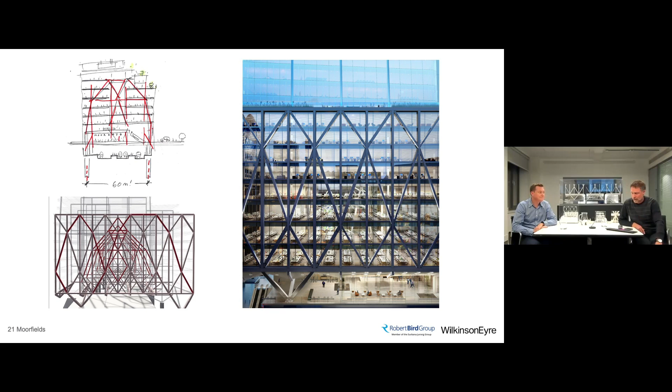The first thing I'd say is, well, WilkinsonEyre's reputation is we don't get asked to design very many office buildings, and 21 Moorfields is really a bridge over a station, and our expertise over the last 25 years has really been bridges and stations. Dave and I were just talking about this earlier, and 8.5 years ago, Landsec brought them on. I didn't really know who they were, but their reputation was in construction and piling, and 21 Moorfields, if anything, is a piece of construction over a piece of piling. So in a way, we're both playing to our strengths and learning a lot along the way.

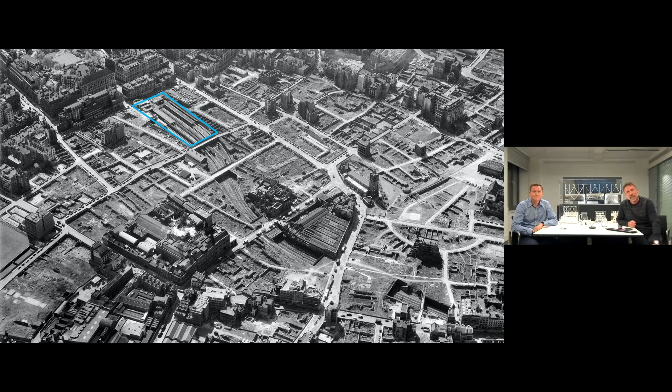So here's a picture of the site just after the war, well, 10 years after the war, actually. It's boxed in blue there. Moorgate Station was a cut and cover station with canopies along open platforms, and you can see what a landscape it was then subsequently developed into. As the Barbican got built, the London Wall development got built, and that whole piece of London became a rather 1960s, probably a lot of it not very characterful, but certainly something that you'll all know.

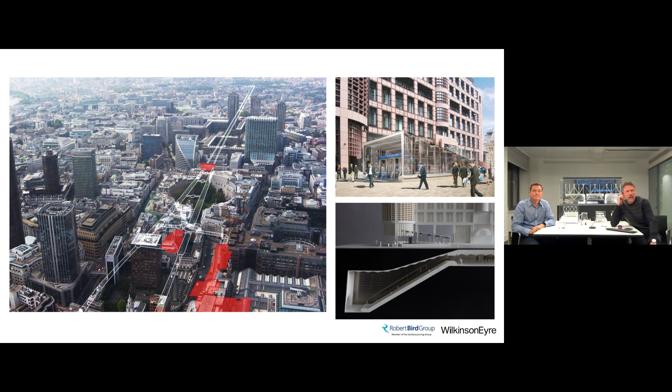WilkinsonEyre have actually been working on the site for 25 years, ironically, as after doing the Jubilee Line extension, we got involved in Crossrail. And Crossrail trains are so long that the station is actually Liverpool Street and Moorgate, with the trains end to end and a canopy entrance at both ends, so one at Moorgate and one at Liverpool Street.

This slide shows the Liverpool Street canopy, which is now built. It's got a hoarding around it, waiting for the train lines to catch up. I don't know if Michael's going to tell us more about that.

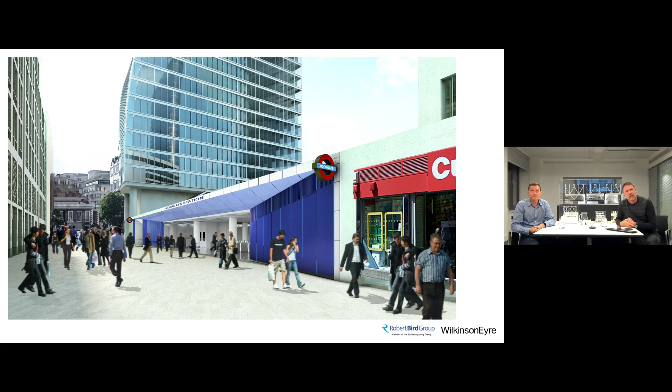At the other end, it very nearly happened that we proposed this ticket hall, and it completely goes over Moorgate, the six lines plus the new two Moorgate Crossrail lines. And it very nearly was just a one-story building in the city.

Michael reminded me when I came to present it through the planning process that actually through the Crossrail development, he argued strongly that Crossrail should invest in putting in a pile right through the middle of the Crossrail station, so that the building could then carry a development over the top. And WilkinsonEyre did a study to work out how this pile could be threaded down through the Crossrail tracks.

Ironically, we didn't know we'd be back eight years later trying to build a building over the top of the station. In fact, Land Securities, when they appointed us to look at the station, to look at the oversite development, didn't know that we were the architects on the station. There was nearly an embarrassing conversation where they said, 'Oh, are you conflicted? We can easily find another architect if you don't want to do it.' But luckily, we convinced them that we were the right people for the job.

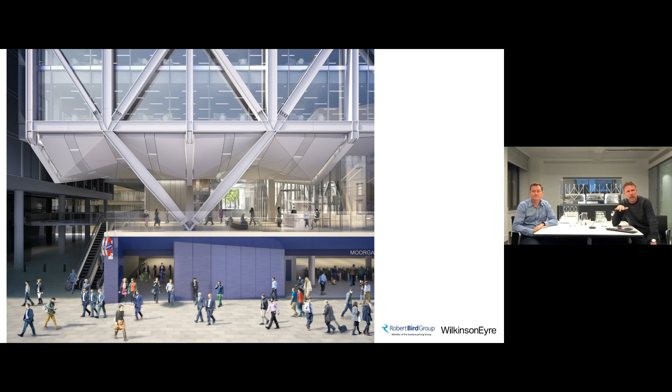And luckily, too, we looked at it not just as a station in the ground floor of a building, but we thought actually you could lift the building above the station and let people flow underneath it. If you think of how this part of London works, A, it's very dense, there's lots of people spilling out of Crossrail, but B, the Barbican is just behind, so creating a new level that people could use as a new bit of city with places to sit and places that trees are planted.

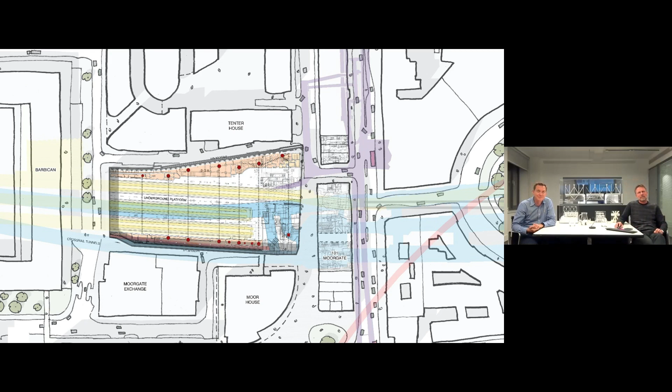Some of the spaces were mess rooms or changing rooms, locker rooms, and could very much be relocated, but other zones were switch rooms or transformer rooms, cables powering the operation of Moorgate Station. So it's a good picture of how heavily constrained the problem was underground, and Giles will later talk about above ground.

So the first big challenge from an engineering point of view is how do you create foundations within an operating station? It's important that the agreement between our client Landsec and London Underground was that Moorgate Station would keep running with no interruption through the entire construction process.

Where some other oversite developments have had the benefit of phased or periodic closures of stations, we had to work out a method to do this while maintaining the full operation of the station throughout. On the screen here I've taken a couple of approaches, relatively unconventional, but that have been done before.

In the middle there's an image I've credited to Arup on their Claridge's project, using a method of hand-dug caissons. That's the same method used for Exchange House at Broadgate by Skidmore, Owings and Merrill. An alternative, used with Foggo Associates at Cannon Place on the right-hand side, was to create groups of mini piles.

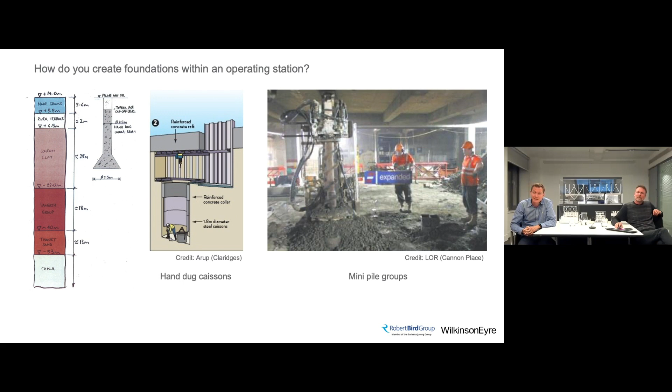Now both these approaches are technically feasible, but both create a lot of muck and disturbance in the station environment. Actually, one of the biggest constraints with the brief we were working to with Land Securities was that both these methods would only give us about half the capacity we needed at each of the support positions.

So Giles, if you'd move over. Yeah, there was this light bulb moment really early on, a very exciting idea, a different way to look at how to create foundations in the station environment. It was to say, essentially, can we treat the deck and the roof over the station as our construction site and try not to be in the station environment at all?

It needed us to create a full temporary steel deck over the top of the station. But what it opened up was the possibility for really large diameter piles to be used, a very large piling rig, like you would essentially on a brownfield site.

It also meant, if we thought about how we designed the piles and the pile casing - you can see the pink in the section sketch there - that pink indicates a steel casing coming right through the station environment, up above onto the roof.

So we could use the piling rig, and all the spoil arising out of the drilling operation would actually arrive up above the station and not cause any disturbance. I love this drawing because the piling driver is driving around on the roof of the station, and there are all these commuters waiting to get on their train down below.

And it really was built like that - it ran 24 hours, so it was all through rush hour. Apparently if you break the Circle line it costs £900,000 an hour, so we were very careful not to.

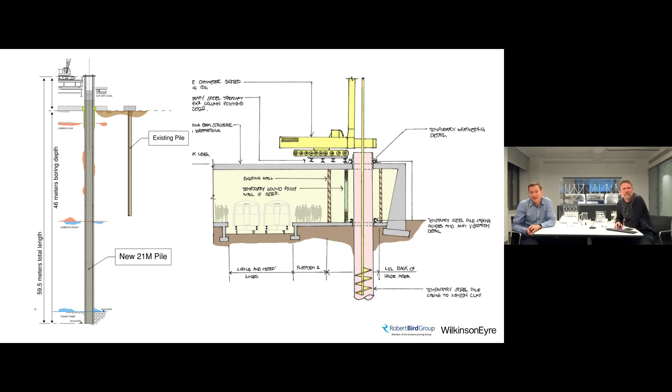Just one last thing on the previous slide, Giles, if you can - on the left, that's a section of one of these piles to scale. It shows it goes right through the London clay, through the Lambeth group, and toes into the Thanet sand. That was really important to get the capacity we needed, and I'll touch on that a bit more.

So we knew we could only build in those two strips of land, north and south of the station, and we thought, well, that can't be that hard. But when we got inside, everyone had an opinion about where you could and couldn't build the piles. It's actually public-owned land, so we had to get mayoral approval.

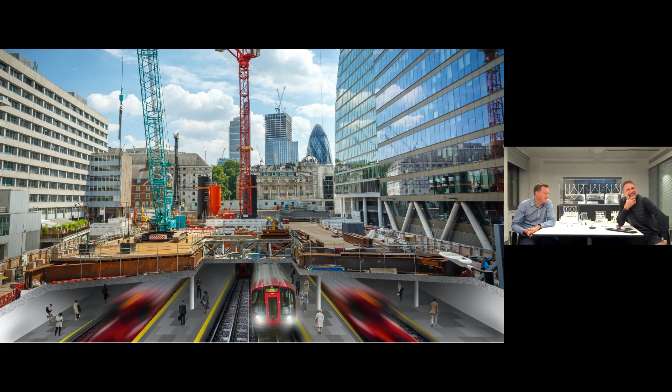And of course, this pile is like this massive big drill coming right through the ground. That room was toast afterward, nothing left, but we certainly managed to get away. I think those images show pretty much the content of the first hour to hour and a half of our design team meetings through 2014 to 2017.

And Giles, you loved every moment of those piling meetings, didn't you? Yeah, he would sometimes throw his toys a little bit and say, I'll come back when we're going to talk about the facade, it's a bit more interesting.

You're not wrong. Obviously this is an edited picture, it's just trying to show and give some understanding of what was above the station and what was below the station at the same time.

So you can see all of the rusty steel there is the temporary steel grillage that we erected. The light blue crane is a slave crane, it weighs about 200 tonnes. Behind it there's a black mast from the piling rig itself, again another 200 tonnes. You can see that temporary steel grillage spanning to the station columns, meaning the station roof takes no loading, but we are temporarily supporting the weight of that piling operation on the station columns.

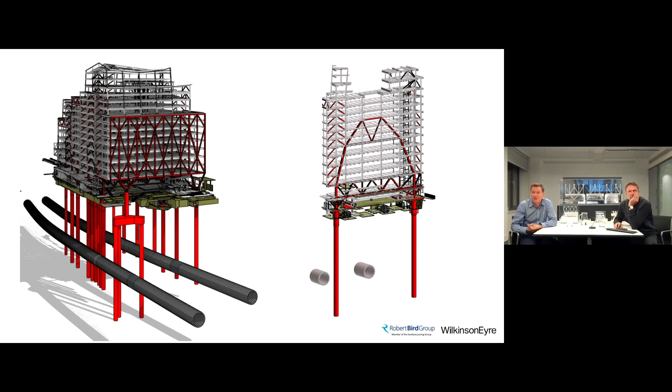So eventually we had a really big challenge. In order for the building to be viable and meet the brief of our tenant, we really had to push the envelope with piling technology and design these piles for a load that hadn't been done before, about 65 meganewtons.

In order to do that, we had a good theoretical basis for justifying that capacity, but we had to prove it. This table and image show the bespoke test pile rig we put together to do that test. There are 4 piles used as anchor piles, as tension piles, to generate a static compression force of 50 meganewtons. So we loaded this test pile to 5,000 tons, much higher than what had been done before on the other projects referenced there.

Interestingly, the test pile performed much better than we thought. It was meant to fail at that level, at 50 meganewtons. We extrapolated that it probably could have continued to carry load to somewhere between 60 to 70 meganewtons, much higher than expected. It opens up the thought that there's more capacity to be explored in the Lambeth Group and the Thanet Sand, which maybe enables more efficient development or taller buildings.

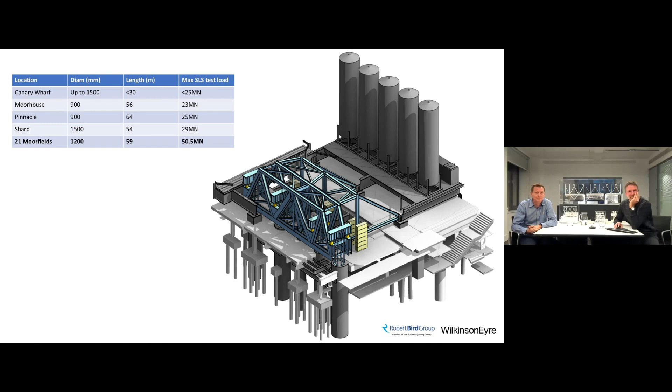Here's an image of the actual test pile structure that we created. I'm not going to move off this section without saying these are the highest capacity piles ever built in London.

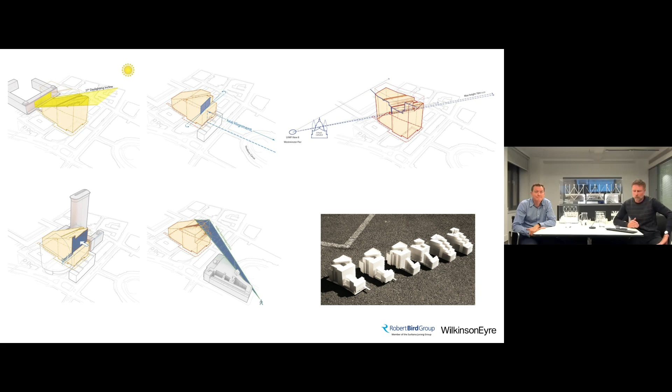While that was going on below ground, we were struggling to find a form above ground. A building like this, with such an extraordinary challenge and cost of building underground, isn't going to get away unless you can absolutely maximize what's possible above ground. We did that by creating a solid block and then cutting away constraints, such as the rights to light to the Barbican, a setback on the upper floors that the city wanted to see from Moorfields, and keeping out of specific sight lines of Finsbury Circus and St Paul's Cathedral from Westminster.

It's worth looking at that view. If you ever go and stand in it, I thought it was a bit of a fuss over nothing until I went down and stood there. It's a really impressive view because you're seeing St Paul's Cathedral set in blue sky, with sky either side of it, behind the Royal Festival Hall. You're looking east and you can see the cathedral. So we would have been in the backdrop of this, and we were forced not to be.

This created a crease across the roof of our building. If you can see St Paul's at the top there, the crease behind what we call the crown of our building is created just by staying out of the view between the two church towers as you're looking from Westminster. Then this rotated upper floor facing towards Finsbury Circus is again an architectural response to a local setting.

It's interesting to see that if you look back at buildings tried for this site - two by Foster, one from the mid-90s and one from the mid-noughties - they both effectively tried to keep out of this view from Finsbury Circus by stepping down towards Moorfields, similar to how we stepped down towards the Barbican to the north. To the east, we said, well, no, we're going to rotate our facade and look straight down the avenue, centring ourselves on the avenue of the circus. The city, Peter Rees at the time, found this a very attractive urban move and was very supportive of having a bigger building to the south.

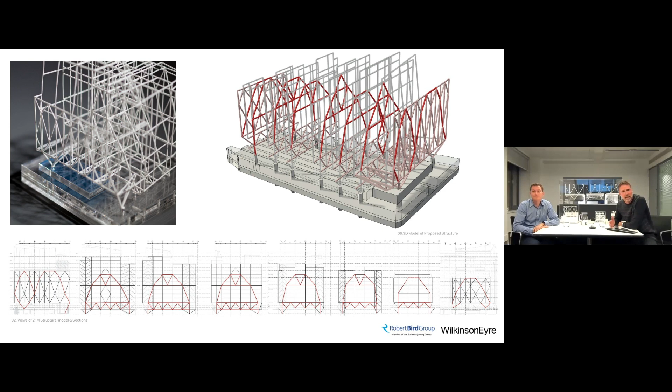The challenge for us, though, was that the chaos of the placing of the piles and the randomness of the different section of each truss across the length of the site made it very difficult to create anything approaching an architecturally expressive form. That for us has been the real challenge of making this into a piece of architecture. I think the answer really came from getting into the structure, really understanding it, and making it do the talking. And over to you, Dave.

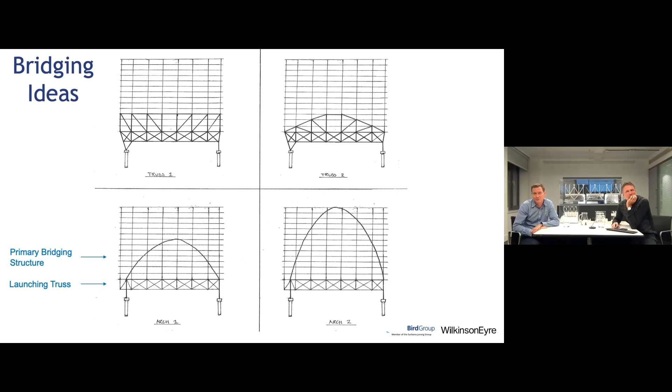One unique thing about our thinking on this project was when using something like an arch as deep as that over, say, 10 stories, the structure doesn't really do the job of bridging until that 10th story is in and the full bridging structure is available.

So it can create a condition where a lot of temporary works is needed to support the structure until that element's in. We tried to think differently about the incremental creation of a bridging structure: firstly, using a compact trussed form at the bottom to give us capacity to build the frame above. As we build the frame, we create the primary bridging structure, minimizing temporary works and making the build very simple. We established this launching truss at the bottom, and then build relatively conventionally from there.

Even the launching truss, we evolved our thinking quite a lot with Giles and his team. Initially, we thought a heavy truss structure, we want to hide that, or integrate it with the plant space and loading bay so it's not seen in the spaces. That was quite compact, not very efficient, and made it quite difficult to work around. Giles and his team were really open-minded about how do we actually embrace this and make it part of the architecture.

So it was much more efficient to move toward, and we eventually delivered, this design where the launching truss has moved up into level 1. Originally, where it was in the plant zone, you had to drive all the trucks in, and the loading dock, water tank, oil store, and all these things had to sit alongside these massive big trusses across the space.

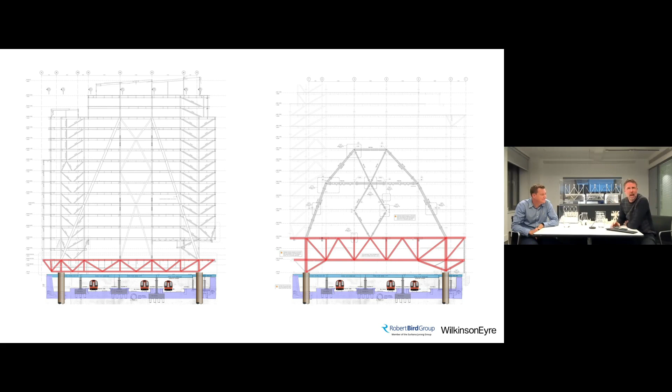We had this emergency meeting saying we just can't fit these things in, and Robert Bird suggested we move this up to the upper level. Could we live with that? We thought, well, actually, suddenly it's a great thing. Everyone walks through it every day, and you're aware once you're in the building that you're in this massive big truss, or series of trusses, and the main street of the building goes down through the arch one after another.

So with this concept to launch the frame on a launching truss, shown in red, we then started to think with Giles, Land Securities, and the letting agents about how do we form the primary bridging structure. The thought initially was this Queen Post truss concept, where essentially we've got two raking sections, close to vertical, as close to vertical as we can make them, so they don't intrude into the space so much. Well, that was the view at the time.

But what we found as we analysed this is you can imagine the loading on the floors in the middle of this system, where the vertical bracing is shown. That floor loading is having to hang up to the node of the Queen Post truss at the top of the frame, and then strutting compression back down. It's a really long load path and not a particularly efficient one.

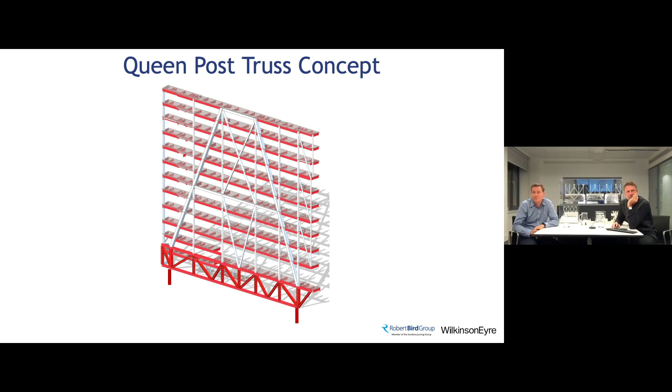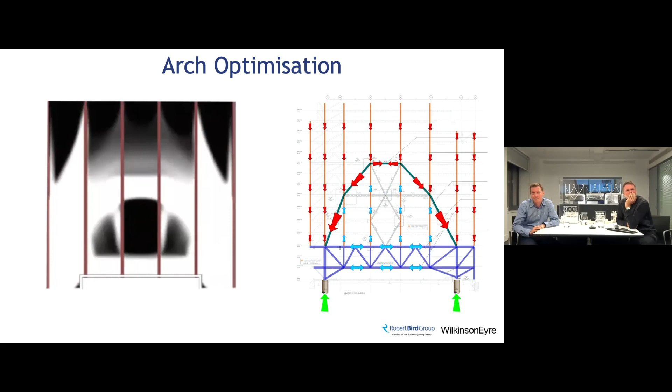So we started to think more about how to bring more efficiency to this form. Some topology optimization, form-finding analysis on the left-hand side, giving the computer a bit of freedom - we set the constraints of where the vertical column grids were, but gave the computer freedom about the geometry of a bridging structure. It's returning something quite intuitive, that an arch is the more efficient form. But interestingly, it's also returning that the height of the arch is more efficient around about this level - I'll come on to that on the next slide.

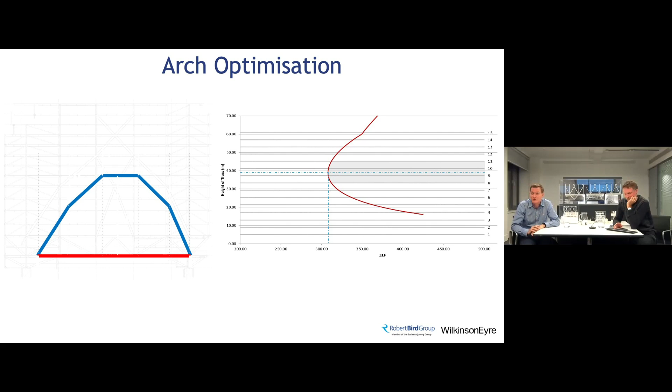The graph on the right-hand side shows, on the bottom axis, material usage - increasing material to the right, less material to the left. On the vertical axis, we're showing the crown piece of the arch, how high the arch is. Interestingly, you can see there's a sweet spot, and we might have expected it to be more specific, maybe at one level, but there's actually a zone that is a sweet spot - around about 8 to 10 levels was the optimal height for the arch structure.

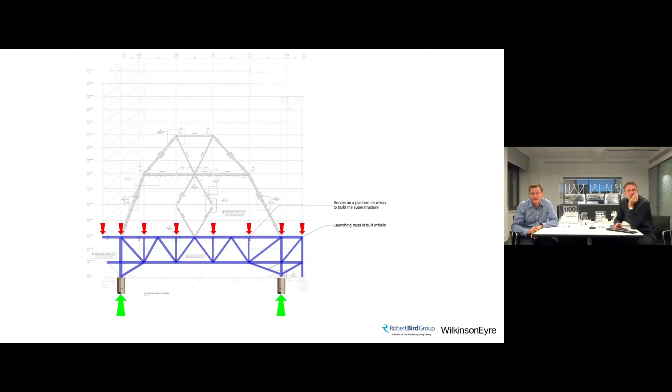And here also, these next three images indicate how the frame actually becomes erected and built off this launching truss, and show some of the force paths. That's just showing the assembly of the launching truss initially. Jump to the next one.

As we build the frame up, you can see vertical loads coming onto the launching truss here, but we don't have the arch assembled yet, so the arch is not contributing to spanning across the station at this point. You can see in the launching truss, the red arrows are compression, blue arrows are tension, just conventional bending action in that launching truss section.

Then once we form the arch, it starts to contribute as a primary bridging element, carrying compression thrusts indicated by those red arrows. As they land at the base nodes, they start to induce tension into the launching truss. It actually reverses the compression that was in the top chord of the launching truss and puts that chord back into tension, so we're getting a full load reversal in that element. It means we're using it really efficiently in the temporary case to help us build this, and then reversing its load in the permanent case—getting two birds with one stone, you could say.

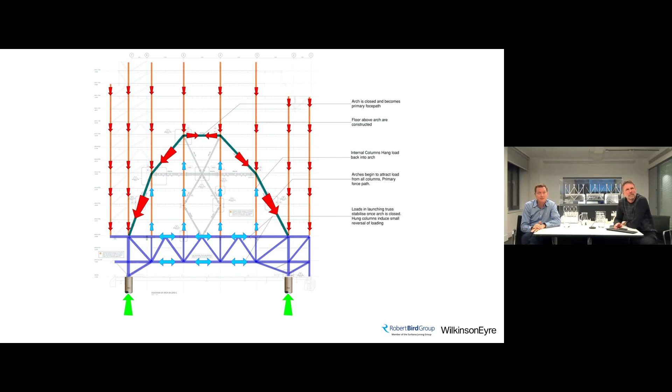We're right at the cusp of joining this building up, and meanwhile the Circle Line is thundering through every day. So the final bit of the story we wanted to tell is to do with the east face truss.

Which is probably the most special bit, because it's maybe not the most difficult, but it's the bit that everyone will see every day as they walk to work and pass the building. It's a real look-no-hands moment of floating over the public space and the station below.

We'd been solving this problem ever since we started on the project, and we knew it was going to cantilever 11 to 12 meters in one direction and span 48 in the other. It tessellated into a grid of 11 bays across and 7 stories high.

And as these are both prime numbers, it gave us a bit of a problem to find a pattern that was easy to recognize and felt like the front of the building. It's worth saying that 11 bays is 12 columns, which is quite a special number—the only other buildings I know of in the city with 12 columns on the front are St Paul's Cathedral and the Bank of England. But enough about that.

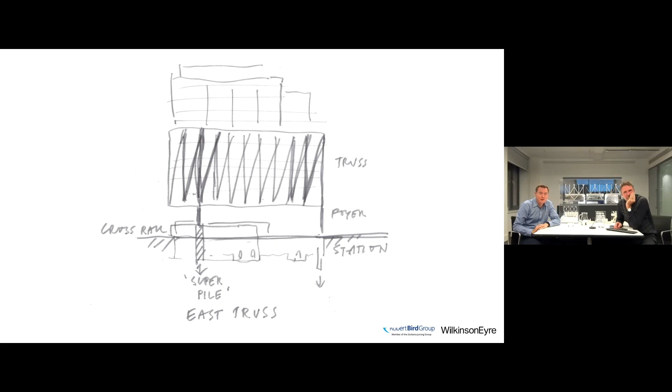We were very excited by that notion and the challenge, but also looking at the initial sketch, the feedback from the engineer, Giles, was: from my point of view, it's such a long load path to have diagonals that hang that way over the full height of the structure—that type of form is not the way it wants to carry the forces.

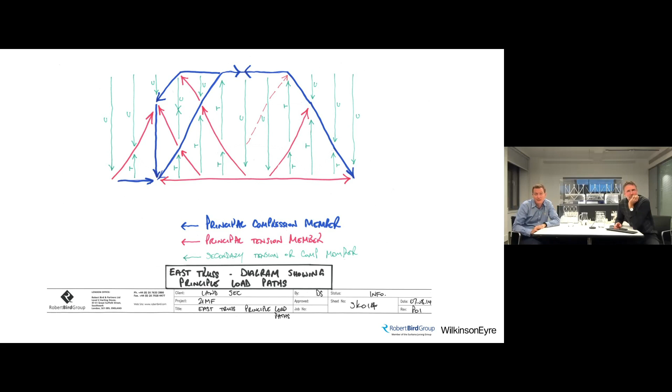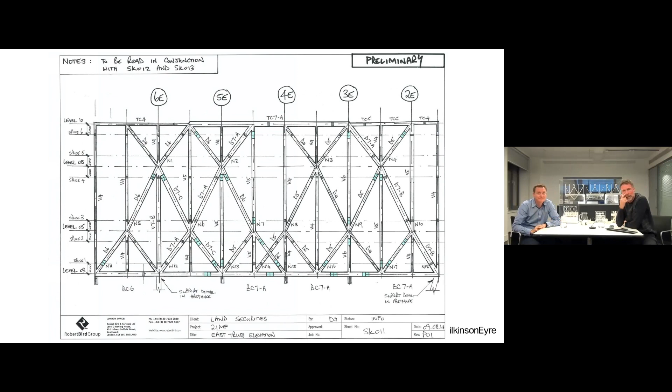At this point in time, we just had 2 support points, and the geometry wasn't quite working. It grew into this Robert Bird drawing, and you can see the bones of the idea of the big arch, and also the launching truss is there. But it didn't quite turn into what we wanted it to be, because of the 11 bays.

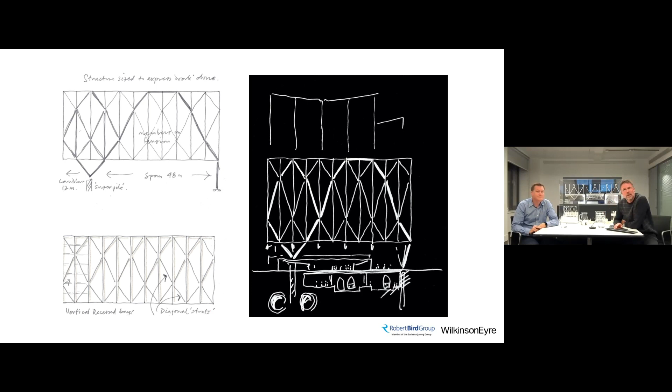But we suddenly had this light bulb moment that if instead of landing on one point, it landed on 2 points, and you had a tripod or a V to catch it, you could create this simple pattern of a repeating fish, slotting together as it goes across the facade. It still has symmetry, but now it's rotational symmetry, because it's about 5.5 bays across. So what's an upside down fish on the left is a right way up fish on the right, and vice versa. We still allowed the main primary arch to express itself, just by the fact that some of the steels are bigger than others, as this big lazy loop over the top of the truss.

I'm just going to try something with this slide to indicate some load paths. We ended up with this really interesting load path. These are the columns that are set back in the taller part of the building, and those columns come down, they land onto a bowstring truss at the base level. We didn't want to have any trusses in the office space, of course, we wanted to keep the office space totally clear. So these bowstring trusses span from the grid behind to the front grid as well, and they deposit this force that hangs from the east face truss.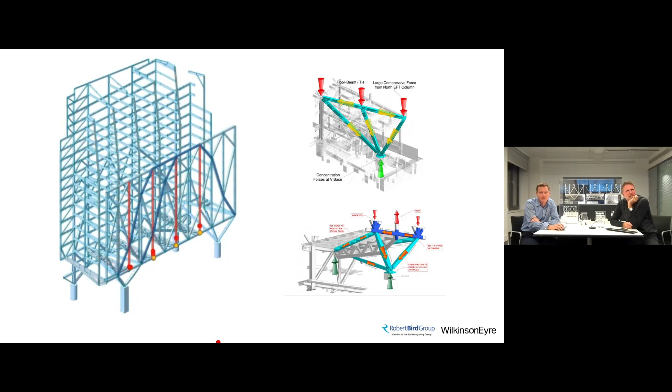These red dots here are going to indicate the primary force paths through the east face truss, and then as the yellow comes on, indicating secondary force paths as they flow through the east face truss. So it's an interesting form that creates relatively direct load paths for the primary paths, and a lot of redundancy in the frame, with the presence of secondary load paths.

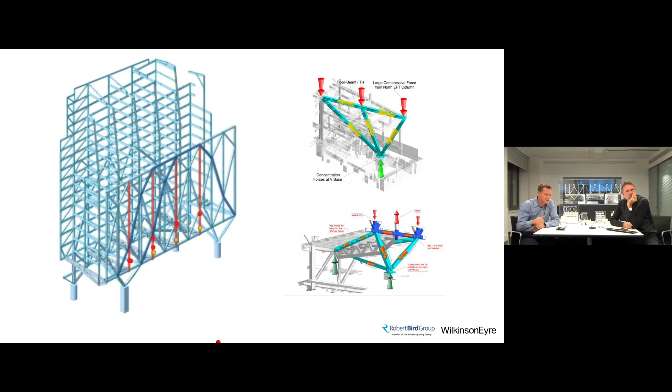But the thing that it threw up was that the building would land on this tripod. And of course, this actually stands in the main public space of the building, it's this kind of shallow hand holding the whole building, and it's taken this extraordinary force down through Crossrail. That image on the right is the actual tripod base. It's 27 tons and 2,000 hours of welding to create that single block just lifted into space there. But it'll always be there as this one main primary space of the building.

Just for a bit of scale, the plate sections that are forming that node are 200 millimetre thick pieces of plate.

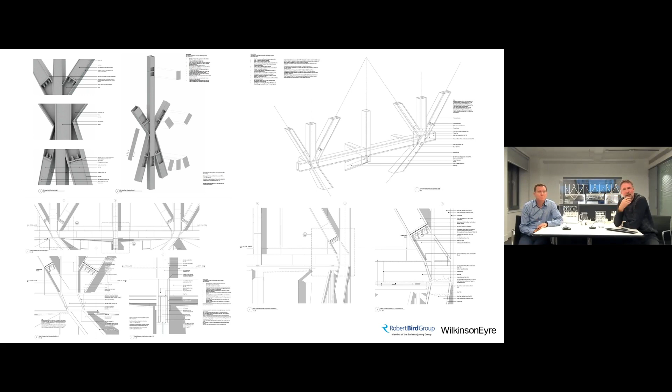So now we knew it was a building about the connections, about the big striking lines of the trusses. We did a whole architectural set of drawings that went to the steel fabricator of how exactly we wanted those connections to look. And of course, some of them are fancifully out of the kind of architect's playbook, big bolts and recesses and shadow gaps, things the steel fabricator was really not accustomed to working with. You have to think that a steel fabricator might one day be building an oil rig, or one day be building a power station, and here we were asking them to create a column that would be compared to other classical columns in the city.

Expressing the verticals with no signs of fixing with welded cover plates, and the diagonals with these big bolts and butt welds, and showing a shadow gap of how the flange meets from one to the other, has been something that we've brought them along on that journey, and they're just as excited about it as we are now.

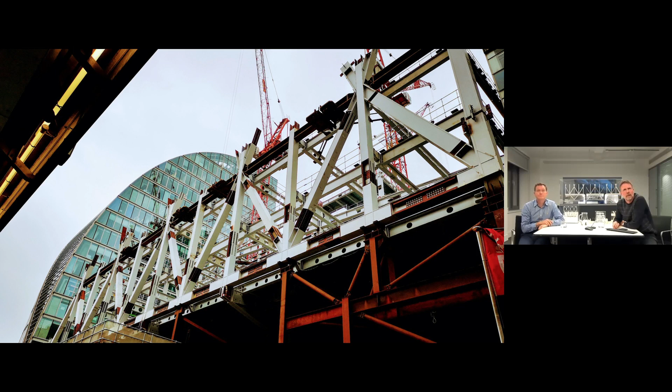And then here is the truss. Similarly to the launching truss Dave was describing earlier, it's got a temporary chord on the 5th floor that's holding the whole thing together. It's now, again, about 6 weeks, it's self-supporting. You can go and look up—it's covered in scaffolding now, actually, so I'm afraid you can't look up. But that steel, the rusty steel will go, and the big true kite shape will come into form and be the recognisable emblem of the building.

And of course, later on, once the elevation is in place, that same rusty steel chord gets removed at that point.

So it's an efficient way to use the primary structure to support itself in the temporary case.

As we went through the design process, this has been 8.5 years, and we did 3 planning applications. Each time the building got bigger and the public space got smaller, and we had to think of new ways to go back to the city and say, we've got this great idea for this public space, and actually it's got more exciting in a way.

So there's little courtyard gardens. We got Andy Sturgeon, the Chelsea Flower Show garden designer, to design us a little garden.

As you walk along the south of the building, you're on the high walk, and we're growing plants on these cables that mimic the big shapes of the trusses, with light works projected on the other side of the wall.

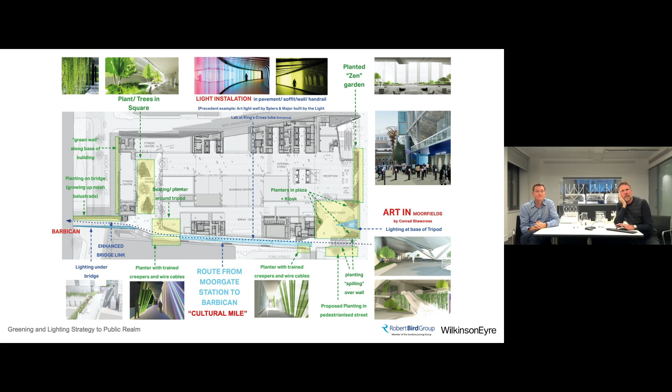Above that, their public-facing areas, a Barbican level with an auditorium and their art gallery and so on. Then above that, these massive dealer floors, literally the size of football fields, with the glass lifts coming through, and you can see the engine of the bank in operation.

And then as you get to the top, the form breaks down and creates these courtyard spaces and atrium spaces with lovely daylight, and then there's terracing gardens on the rooftop facing out to the west.

And that's where I'm going to leave it. If I can remember how to stop sharing, I'll come back to us.

Thank you very much. I'm sure we're going to have a series of questions on that design and the problems that you were able to overcome. Let me just remind everyone to place their questions and comments in the Q&A box, and I'll pick them up as they arrive. Let me just start on that planning front, if I may.